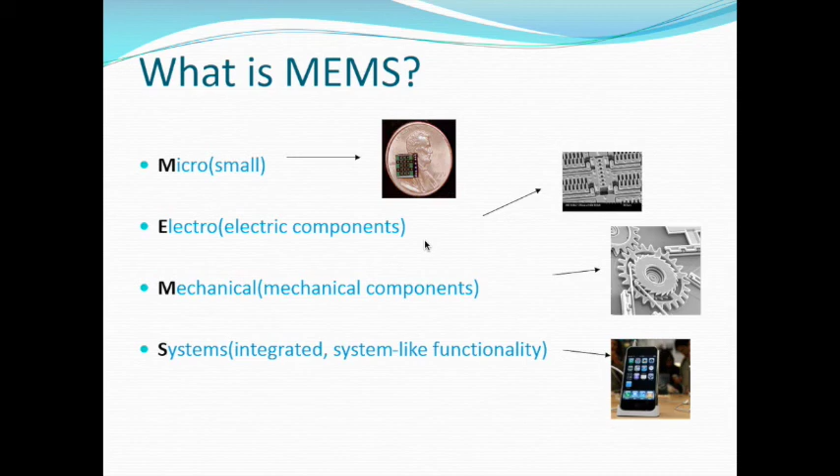A few more examples—you can see microfabrication applications in your everyday life. For example, optoelectronics: solar cells, LEDs, laser diodes. A bit further from this topic, but second, you use an inkjet printer, right? The printer head is a MEMS device—that's actually a pretty typical one.

You also have the gyroscope we just mentioned, for the remote control of the Wii console, the Nintendo console, and microphones, mirrors. There's also application in microbiotechnology—microfluidic devices, which you're going to use in the hands-on part, and lab-on-chip, and so on. These are just minor applications of this field.

The tire pressure sensor for the modern car—right now you still have the tire pressure sensor. You have the airbag sensor here to protect your life during an accident. And you have this one here, the silicon nozzle.

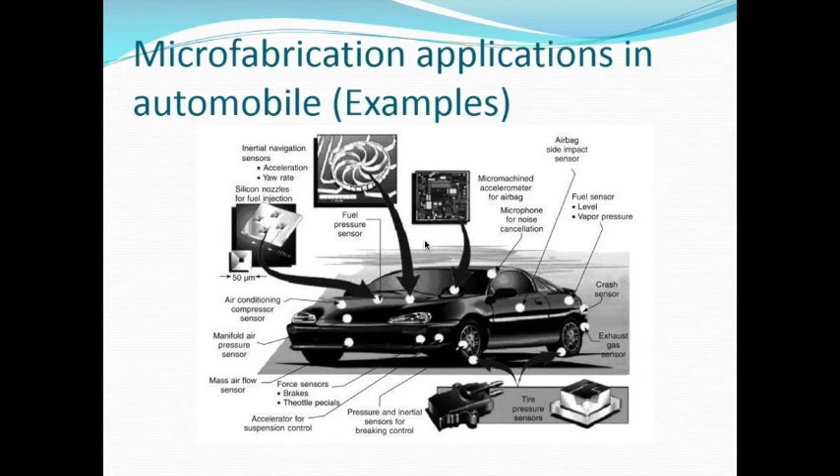So to make the MEMS device, we use a technique called microfabrication, a micromachining technique for making MEMS devices, which was directly implemented from IC fabrication.

So let's take back a little bit of history. What is the milestone here? The first one is in 1947, when three engineers in their lab invented the first single transistor.

Do you remember what—oh, maybe some of you are a little too young to know that. What happened before that single transistor? What kind of device did they have before?

So, exactly, vacuum tube. You happen to go into your grandparents' garage in the corner somewhere, and you see the old radio receiver, the bulky, power-hungry device, a very fragile one with tubes here. That was the time, really huge ones. So that made for this amazing invention here.

The single transistor. And after like 10 years, the first IC came out here. The first IC device was built at Texas Instruments by the engineer called Jack Kilby. When I was working in the States, I had the opportunity to chat with him, and he told me the story of what happened. The funny part, let me tell you.

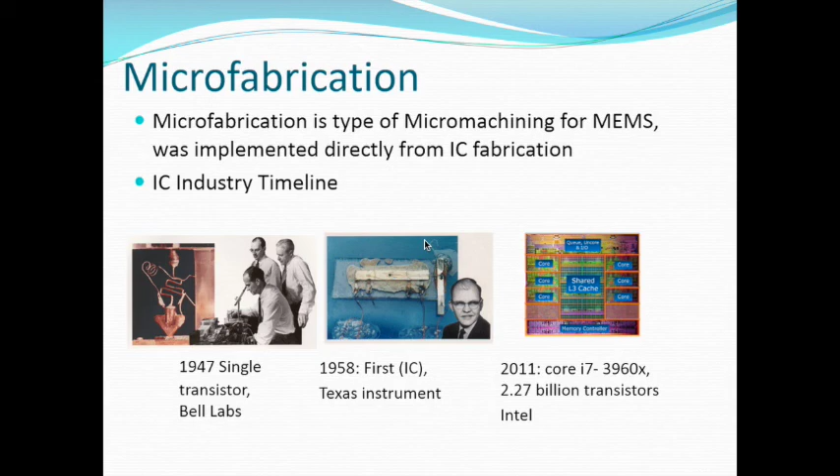Now let's go into a little more detail about the fabrication technique. First, let's look at what we are going to build before we go into the technique. The first IC we saw was probably garage work, right?

It had no clean room, it was a big one. But right now, to build something like a CPU, the Core i7, that's not going to happen without a special environment. That's what we call the clean room. In that place, you have very tightly controlled temperature, particle number, humidity, lighting, airflow, pressure, vibration, electrostatic discharge, and magnetic field. So a lot of things are well controlled in that room.

One of the traditional ways to name the clean room class level, you may hear people saying class 10, class 100, class 1000. The old traditional way is just the number of particles in that room.

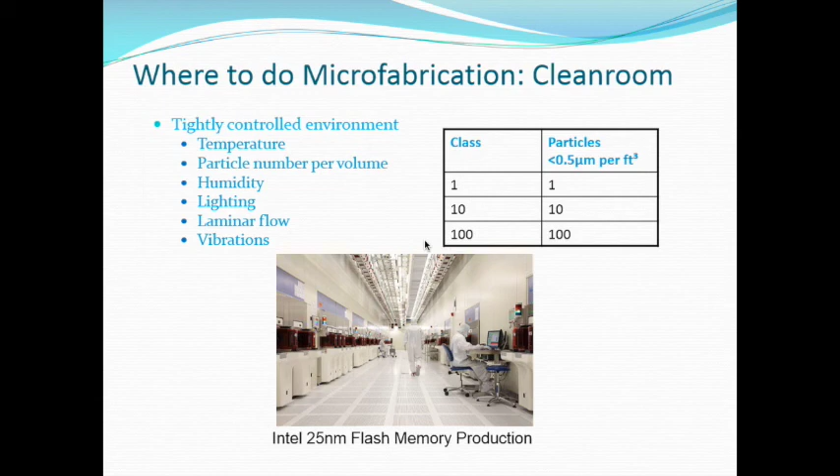A snapshot for the Intel 25 nanometer plant here. And this is the layout for our clean room, which will be used starting this afternoon. Here we have 1,000 square feet. We have class 10 - unfortunately it's not class 10, it's class 100, not 10 and 1 - and class 1,000 here.

This area here is what we call the yellow room, where you'll spend your time doing the hands-on part for the lithography. And this area we call the white room. It was class 1,000, where you do most of your deposition and etching. You may notice the difference - the lighting is different, right?

One is yellow, and the reason, as I said in the previous slide, is that you have light control because for your photolithography step, you want to keep only certain wavelengths. You don't want the wafer accidentally exposed. So that's the reason for this, that's why I said lighting control here.

How can you keep the room clean here? A few efforts have to be made. You need to use filtered, circulated air, and you need positive pressure, meaning the clean room pressure is higher than the surrounding area.

And you need to wear this - be prepared to wear this outfit. It's going to be a little bit hot the first time. You need very clean water, gas, and chemicals. When we buy chemicals, we ask for VLSI grade or clean semi-grade, not just a regular grade, and clean room compatible material. That means the material has to be made with fewer particles. For example, the notebook we use is called a clean room notebook, not a regular notebook.

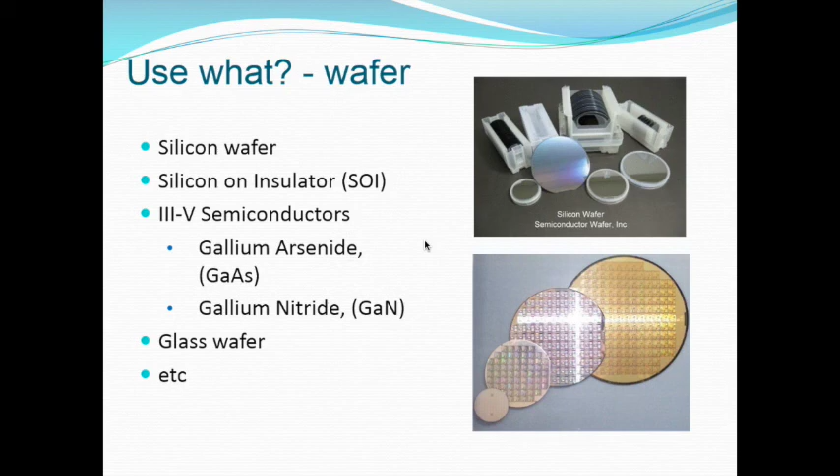Now it's time we go into a little bit more detail. What kind of fabrication technique are we going to use? We break this into 5 categories here. The first one, property modification - you do diffusion and ion implantation to change the property of your substrate or the deposited film.

Then you have the patterning, as in Davis' presentation. We also call it the lithography step. You make a pattern, you transfer a pattern from mask to your substrate. We're going to cover more detail on this topic.

Subtractive - normally we also call this etching. They have wet etching and dry etching. Additive - basically you deposit a layer, you add a layer. This one here you remove something, so you can do oxidation, PVD physical vapor deposition, chemical vapor deposition.

And the process - you're going to connect to the outside world using packaging. So I'm going to talk about mainly this one, and also cover these two as well.

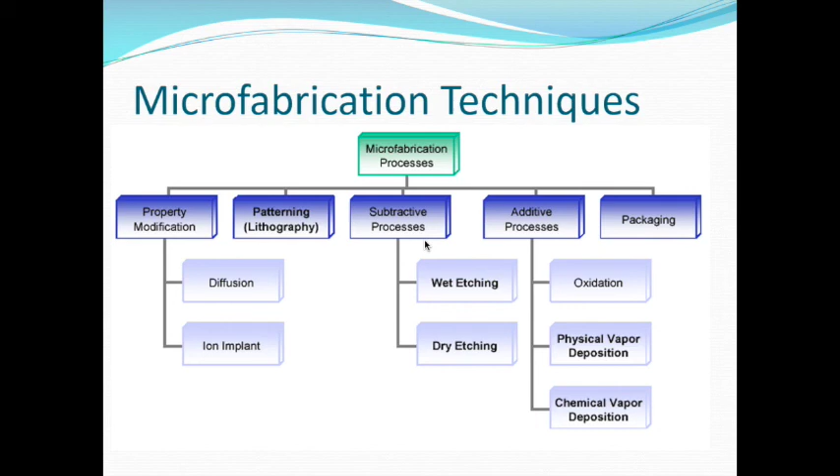So we start with the patterning, the photolithography step here. The goal for this one is you temporarily coat photoresist on your substrate, and you want to transfer your pattern from mask to photoresist, and then from photoresist to your substrate. That's the goal for this step.

Why is this step very important? Because it takes about 40 to 50% of your process time. Let's say you have one project that takes like 4 weeks - about half of the time you're going to spend on this one here.

You're going to keep doing different repeatable steps on the photolithography step here, of course not on the same mask. It's a multiple mask process. Another reason this is very critical is because this step decides what is going to be the smallest feature size.

And that was one of the masks here. I also have the 5-inch mask here, and we also have a 7-inch mask as well. This just gives you an example of how the mask looks - basically a chrome deposited layer on the glass substrate.

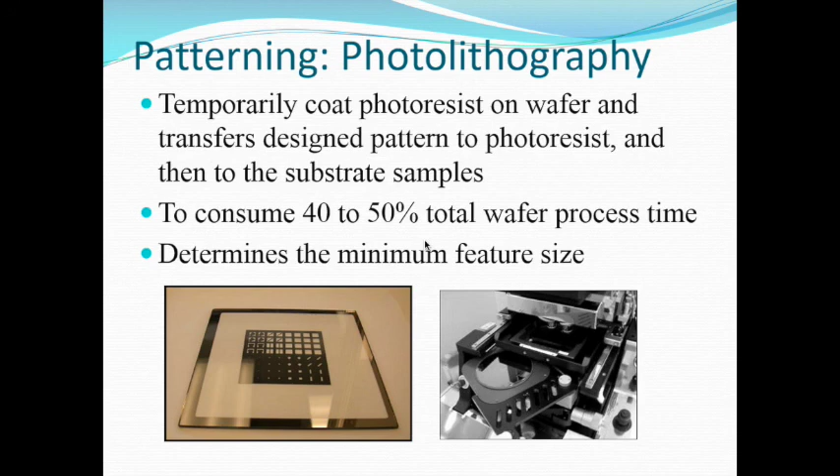So what is the detail for the photolithography step here? Let's assume you start this one with the silicon wafer with a silicon dioxide film on top - that's your starting substrate. The first step, you do a cleaning, to make sure your wafer is free of contamination and particles.

And then you spin coat - you coat a layer of photoresist. And you do a soft bake, to remove the solvent in the photoresist, getting ready for the exposure.

So you bring the wafer to the exposure tool, exposed by UV light. And after exposure, you do the PEB, we call it post-exposure bake. In your case, if you use SU8, you absolutely need this step.

And then after PEB, you bring the wafer to developing, so you can see what's happening on this step. The area exposed by UV light dissolves and is removed, giving you this pattern on your photoresist.

And you do another step of hard bake. Again, this step here has two purposes: one is to continue improving the adhesion between the photoresist and substrate, and to remove additional solvent.

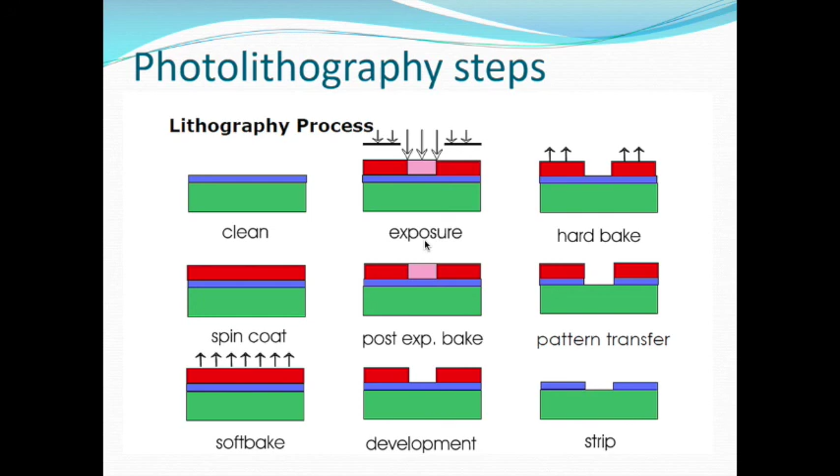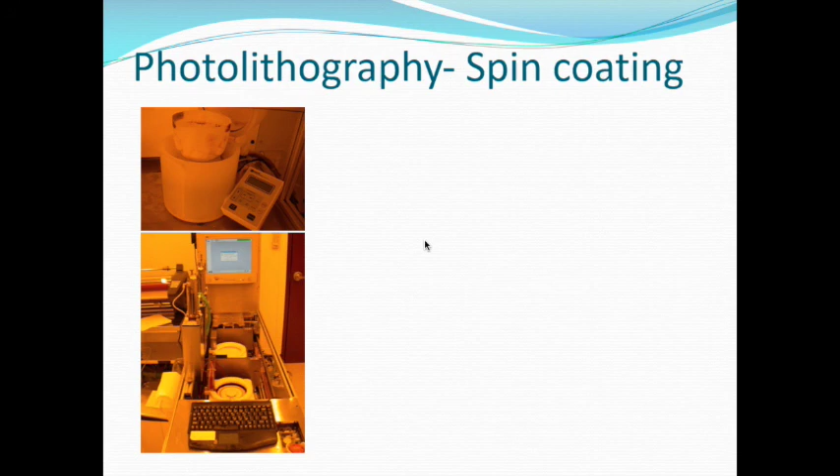And then you start to rotate. The wafer chuck starts to rotate. And at the end, you're going to have a uniformly coated certain thickness of the photoresist.

And after you coat your photoresist, you bring your photoresist coated wafer to the UV exposure tool here. Typically, there are three types of exposure techniques: contact, proximity, and projection.

The contact printing is where your mask is actually in contact with your substrate. This way you make sure you have better resolution.

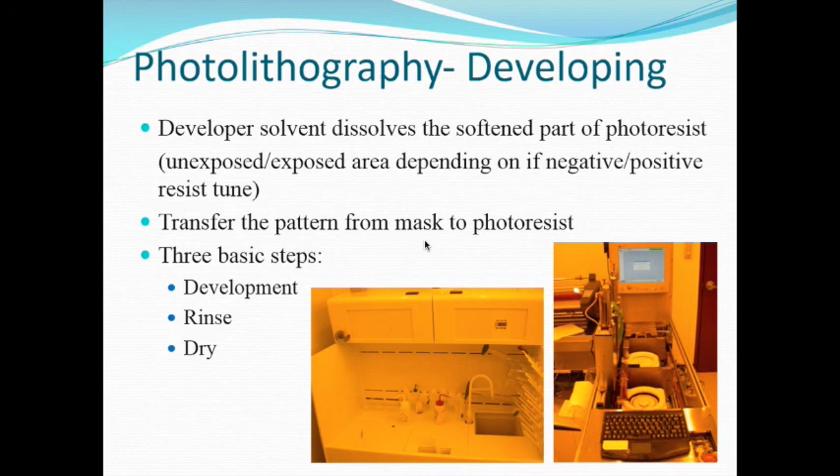And we just mentioned about the photoresist part, which area gets removed or washed away during the developing step. That will really depend on what kind of photoresist you use. Photoresist is a type of material that changes its molecule structure after being exposed to UV light.

So that's pretty much the patterning technique we're going to use.

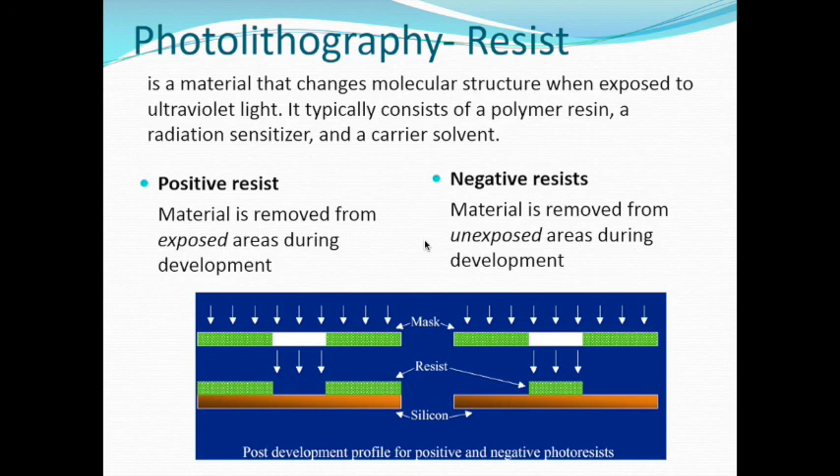One of them is called laser writing. So in the aligner, in the UV tool, we actually use the mercury UV lamp - it's really a lamp here. So instead of that, we use a laser to expose photoresist.

But that one, again, its benefit is one - you don't need to make a mask. So you design your layout, and the machine will make this one. It's good for fast prototyping here.

But on the other hand, it's kind of a long process. You're going to draw the pattern one by one. If you need volume production, it's not really good either - you better make a mask.

So everything is done in one shot. Everything - you have the photoresist pattern laid out. Here, you're going to draw everything.

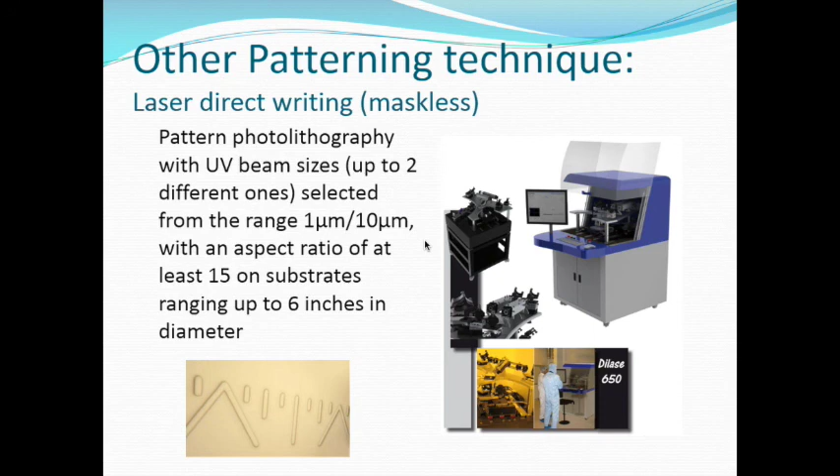Another one we have here is electron beam lithography, which again, instead of the mercury lamp, laser, we use electron beam. The principle is the same, but we use an electron-sensitive polymer, a different type of photoresist. The benefit is again there was no mask needed, and you tend to have small features. So far, the best one can get down to 30 nanometer small features.

The most recent one is another new one, thermal scanning probe lithography, a tool we call the NanoFrazor. Instead of UV lamp, laser, or E-beam, this one actually uses a scanning probe, a heat scanning probe. What happens is the probe is in contact with one type of polymer called PPA. It burns this polymer, causing decomposition and evaporation, making a nanometer range structure like this one showing. So the structure here, you have the read bias and the write bias here. Basically, you are going to heat this tip to burn the polymer.

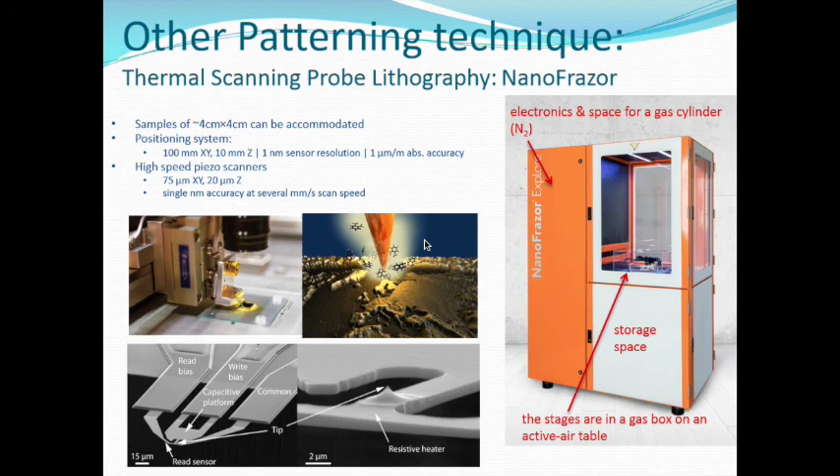So we just covered the patterning part. I'm going to talk a little bit about the subtractive process, the etching step here.

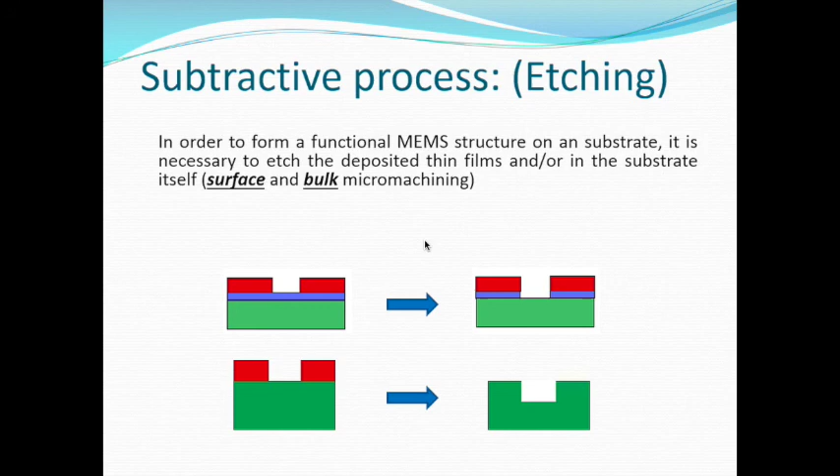Etching processes are normally divided into two classes. The typical one is wet etching. As the name says, you need a chemical solution, like this one here. Dry etching is etching that is more gas phase, dry - no liquid, no chemical, normally using reactive ion plasma, and it's a wafer phase process. Normally it's a single wafer process. Wet etching is more like a batch process, meaning you can do 25 or 50 wafers in one shot.

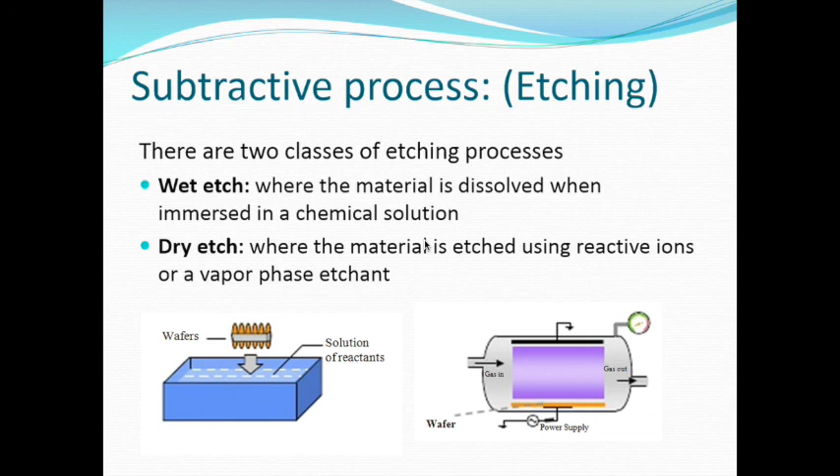Wet etching is normally performed in a wet bench here, using a chemical solution. Usually it's isotropic. What I mean by isotropic is, remember I said in the previous slide, you transfer your pattern from photoresist to the substrate. So what in reality happens? In schematic layout, you see a perfect vertical sidewall like that, but if you do wet etching, you tend to get this shape instead. That's how isotropic etching happens. That's in reality.

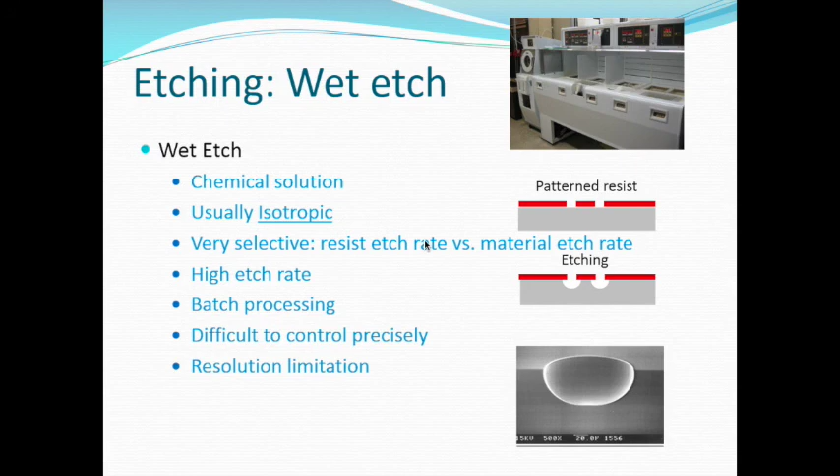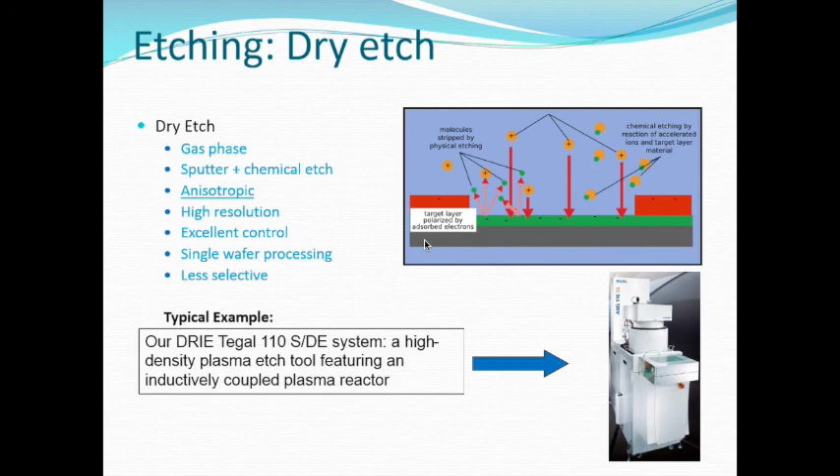A typical and very famous example is the Bosch process, which we call deep reactive ion etching. That's the system we have here. That's the isotropic etching shown here, and you want to achieve this anisotropic result instead - this process can do that.

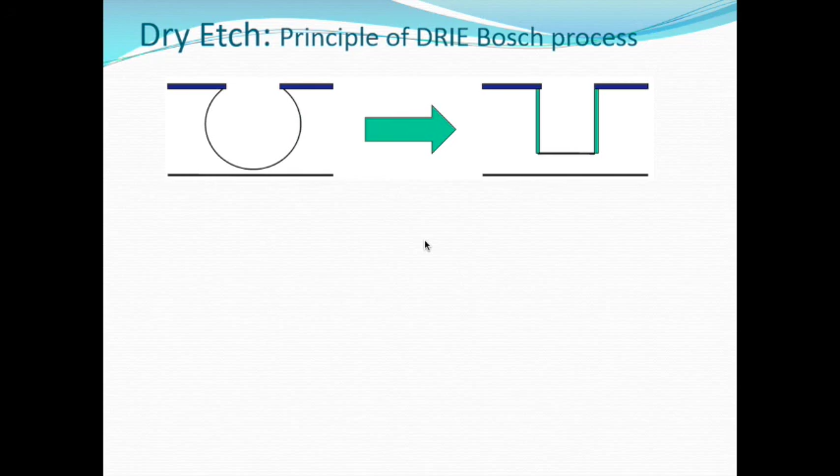How this exactly happens is you use two gases: one for etching, one for deposition to form a protective layer. You alternate between the etching step and the deposition step. You also use ion bombardment to the bottom to remove the bottom polymer layer. So what's exactly happening: you start with etching chemical gas, making this profile, then a few milliseconds afterward you deposit, then etch directly to the bottom part, and then repeat this again. So you do etch, deposit, etch, deposit, etch, deposit, and gradually you get this profile.

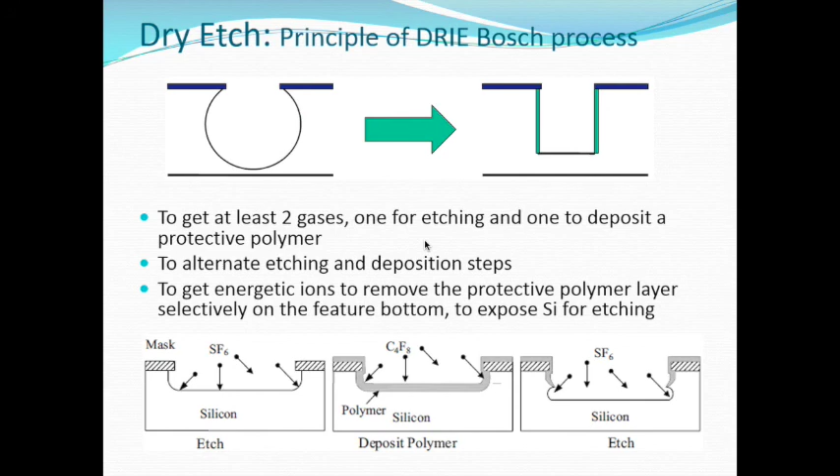So here, the process is the deposition step. Again, there are many categories here. A typical one is called physical vapor deposition. Another one is called chemical vapor deposition. Atomic layer deposition, ALD, and electrochemical deposition, example electroplating. So we had all the capacity in our fab.

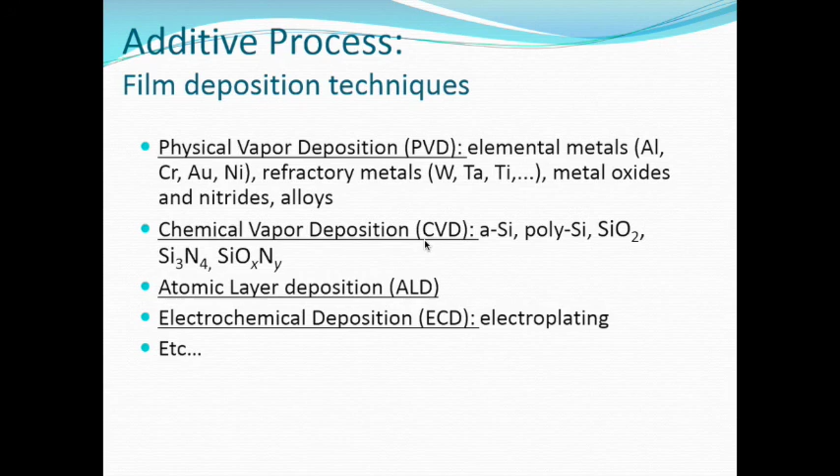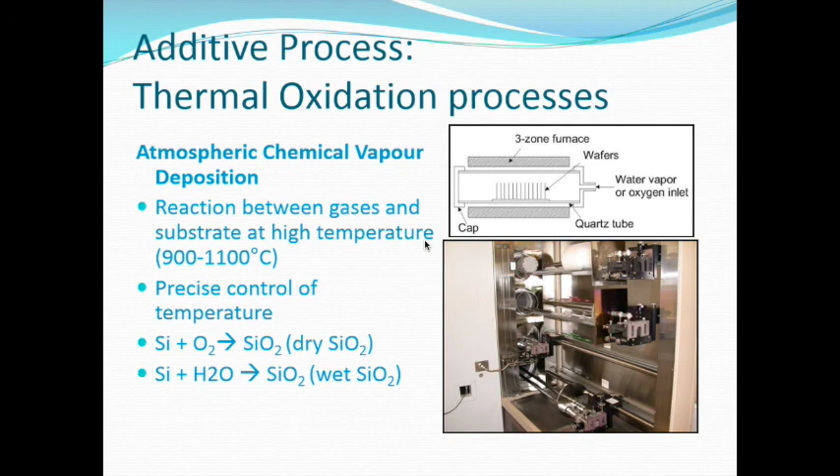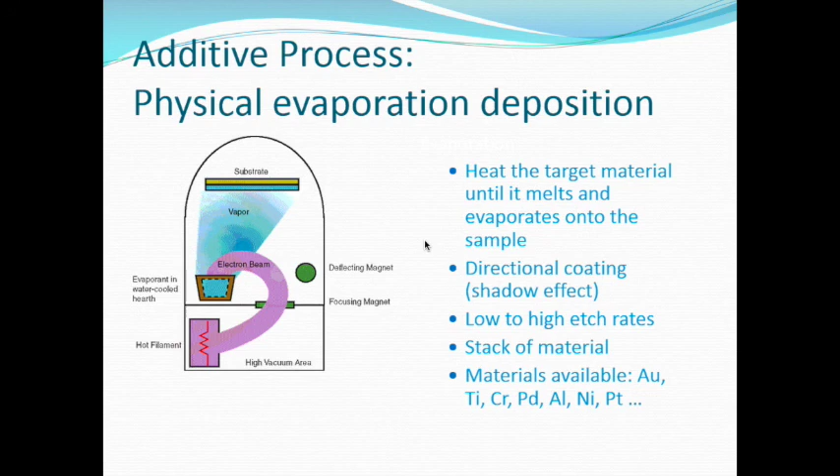So I just gave you a few examples of additive processes. You're not really going to use this for the hands-on part, but I'd like you to have some rough idea about this.

So far, I've been talking about patterning, the etching, and the deposition steps. This is likely when you have a complicated project, maybe with 10 or even 15 masks. These steps will be repeated, used to build up or take down different layers. Etching and deposition combined together in different sequences.

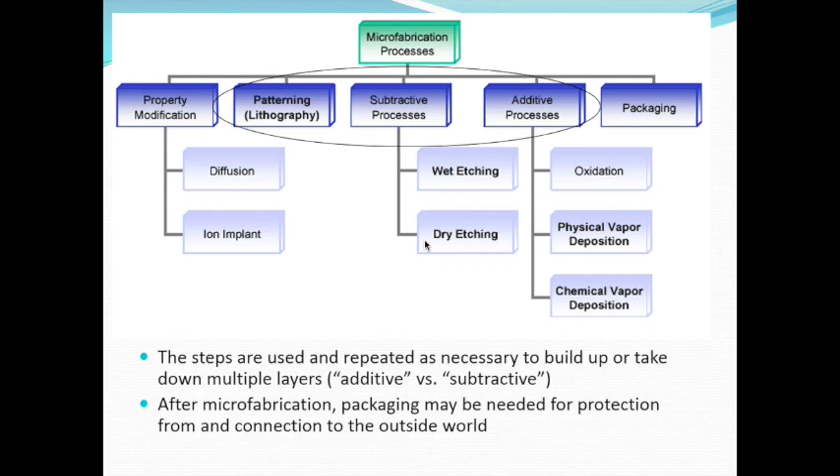After the device is fabricated, like I said, you need to connect it to the outside world and protect it. So just one slide about the packaging part. After you make your device, like the one I just passed around, the wafer, you have so many identical devices. What you can do is use a dicing machine to cut each individual piece, like the one we just saw, and then use wire bonding to connect the contact pad to the packaging.

Not only does it connect to the outside world, but the device may also be exposed to extreme temperatures or harsh environments. So you protect and connect the device at the same time. That's pretty much the rough idea, from the very beginning, the starting wafer, through front end to back end, to get you all the way to the packaging part.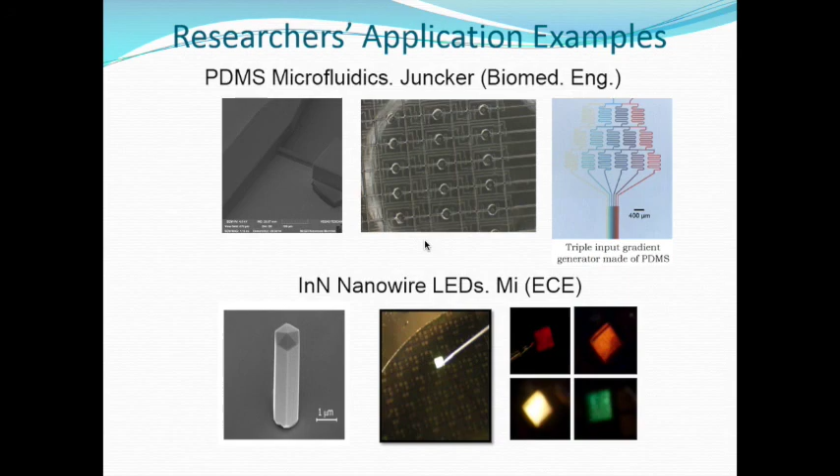This one we're going to talk about is what you'll use for fabrication in the microfab. Normally, when you do a project, you need to think of two phases. First, the design phase. In the design phase, you're going to think about your process flow, meaning which step you do first. For your case it will be simple, just one mask, so you don't need too much thinking about which one goes first. But that ordering can sometimes be critical - you can switch the order, do this first, that second, and it makes a lot of difference, making your process flow more feasible. You also need to see what tools are available and what the limitations are.

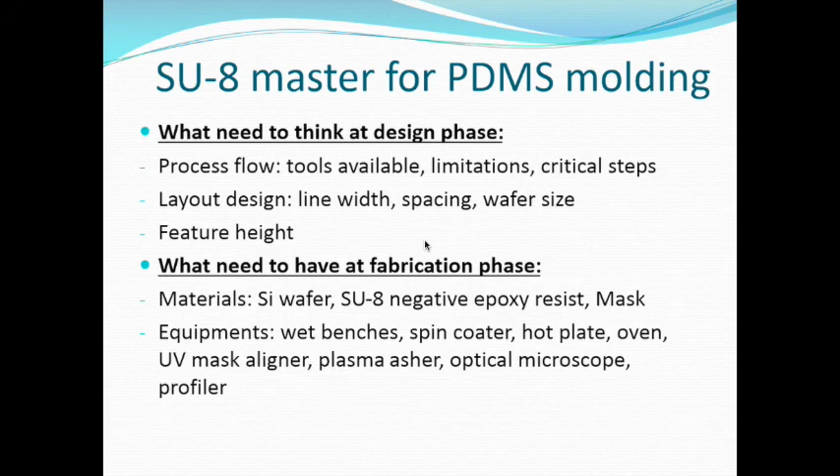This is the one you probably already see on your brochure here. I just want to quickly go over that part. You see here the step names - this is exactly what I was talking about in principle in the photolithography step.

First, you do the cleaning, right? Remember we do the cleaning of the substrate. And here I have HF dip - what's the purpose? I can still put it in the category of cleaning. This job is just to remove the native oxide from the silicon wafer.

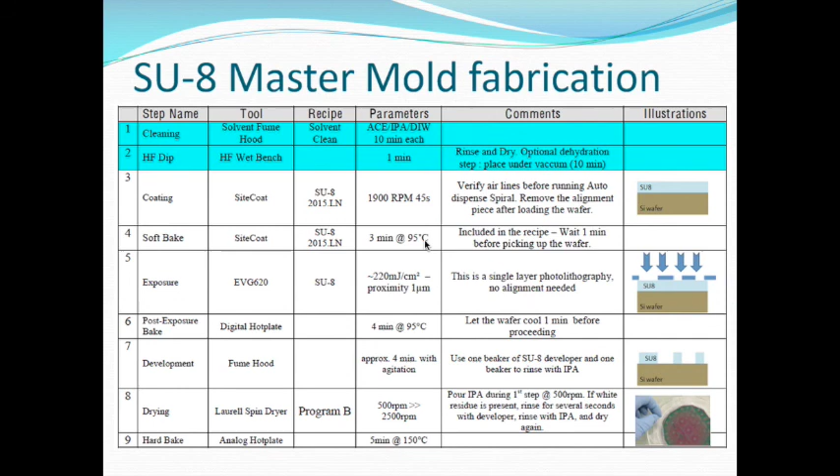I have a video actually, which you can also find on YouTube, and so far I think it's a really good one. You can see the good explanation, you can see the modern technology of the clean room, and I also explain some of the basic process.

So this one is about TSMC. You can just click when you're ready. This video was made by TSMC, Taiwan Semiconductor Manufacturing Company.

That company, if you know this field, is the giant, the big guy in the field of the pure play foundry, which means they only do the fabrication part. I don't do any design phase.

So you give me your design, I do the fabrication for you. But I have a design rule - you have to follow my design rule, you cannot design whatever you like. I tell you my smallest feature, I can only do 45 nanometer. So anything below that, somewhere else - that's impossible.